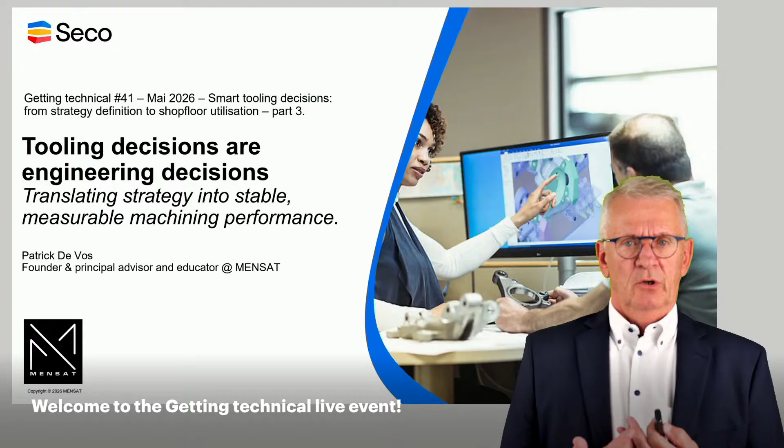Engineering, or engineering sciences, is about translating basic physics things into practical realizations. That's what we call engineering. In today's session, it's about machining engineering, which is about translating company strategy and company goals into machining performance, preferably measurable machining performance. That's what we're going to talk about today.

This is the third session in a series of 5. The first 2 sessions were more theory. Session 1 was a warning finger saying be careful, tooling is important. Session 2 was the first step in defining a good tooling strategy for a company. The first step has to be taken by management, who decide what is good for the company. Once that's decided, we come to the third step in the process, and the third step is about engineering.

In company language, engineering is what is done, and company by company it can be called different things. Some companies call it production engineering, others call it planning and programming, where the NC programs are made. Other people call it the work preparation department, whatever. It is the department where decisions are taken about when and how and who is going to produce our work pieces. That's the engineering department.

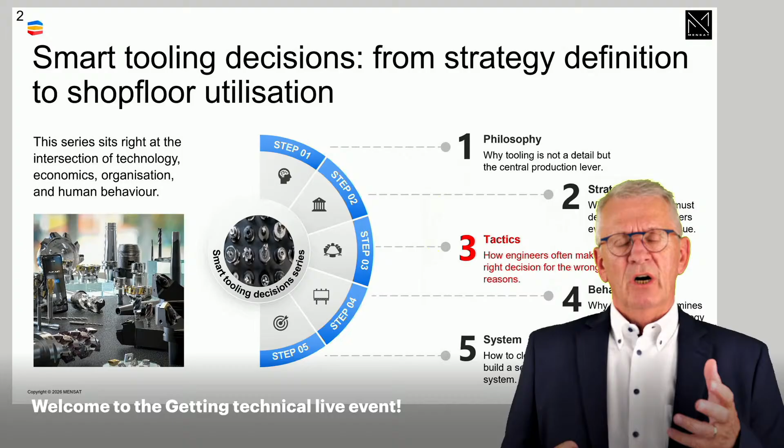Next time we are going to talk about more practical stuff, but let's stay today in the engineering phase of the process. And I'm not alone.

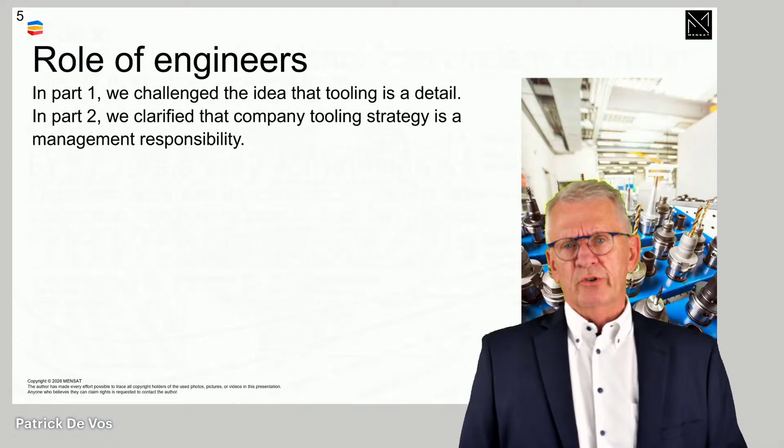Part 1, as I said, was about tooling is important. Some people now perhaps will say, yeah, of course tooling is important. But trust me, the sentiment very often, if you try to discover really in a company, is that on management level, at least, people think machines are important because they are expensive, people are important because salary costs are high, and tools, the cost of an insert is €10, tools are consumables, not important.

I challenged that in the first session, because tools are really important. Tools are actually the only place where the workpiece is in contact with the production equipment, the cutting edge. Tools are important, and you better spend some time on it, because if you don't do that, afterwards you kind of will be, allow me to use the word, punished for that.

If tools are important, and if tools should be handled in the correct way, everybody has to take his role in that. Management has a thing to do, engineering has a thing to do, and afterwards operators have some job to do. Management we already talked about in part 2 of this series, where we said the role of management is not about the details. Management does not have to decide on carbide grades and geometries and all that type of stuff, but management has to decide on what, on a company level, are important goals.

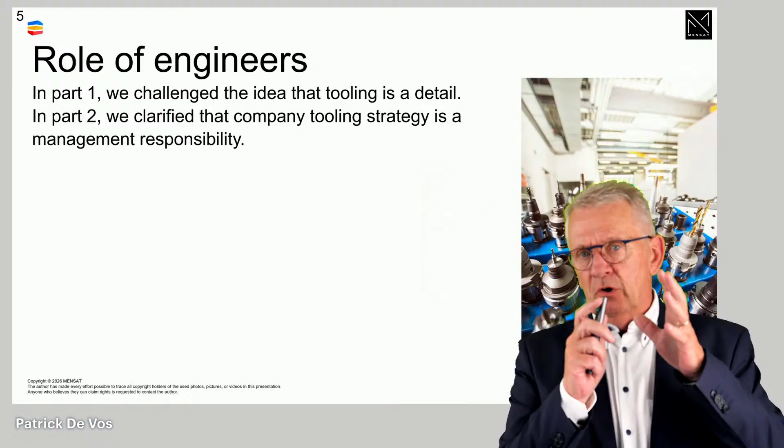What are the KPIs for the company? Is it productivity? Is it profit? Is it cost savings? Is it sustainability approaches? Whatever. That's up to management.

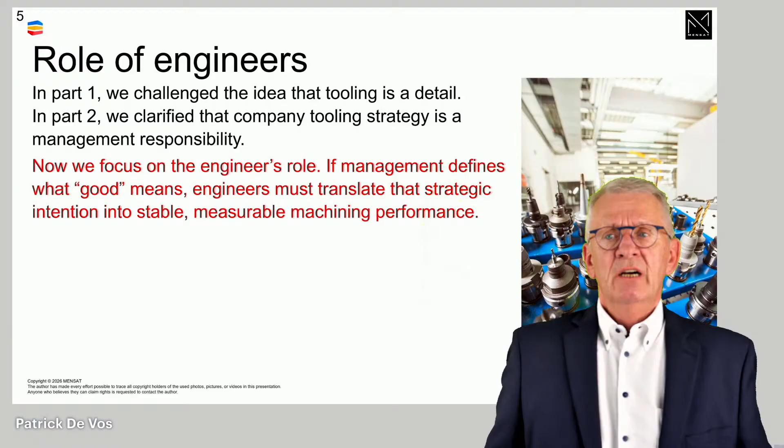Now in part 3 then, we come to the engineering side of it, and what engineers have to do is take what management decided as a target and define processes and systems so that target is realized. Part of those things is tooling. This session is not about carbide grades and different types of geometries, because for that there are technical educations and technical trainings. What we are going to talk about today is how do we decide?

Let me give you an example. Suppose management did not do their job, and we leave it to the engineers to select tooling, to select processes. Well, you are going to find your company full of Ferrari cars, and all those cars are going to be in a race to be fastest. That's the result if you leave it to engineers. They go for performance, they go for speed, it must be fast, they want to win the best possible, highest performance. And nothing wrong with that.

But the question should be asked - imagine if we stay with cars - somebody says it would be handy to have a family car, because my wife or I have to take the children to school and do some shopping for groceries. So we need a car with room for children, and a trunk big enough for the groceries.

And as most parking places in cities are rather small, the car should not be too big. And since mostly my wife is using the car, and she doesn't really care about Ferraris and Lamborghinis, it must be a handy car for her. But she prefers red - red is important for her. She wants a red car.

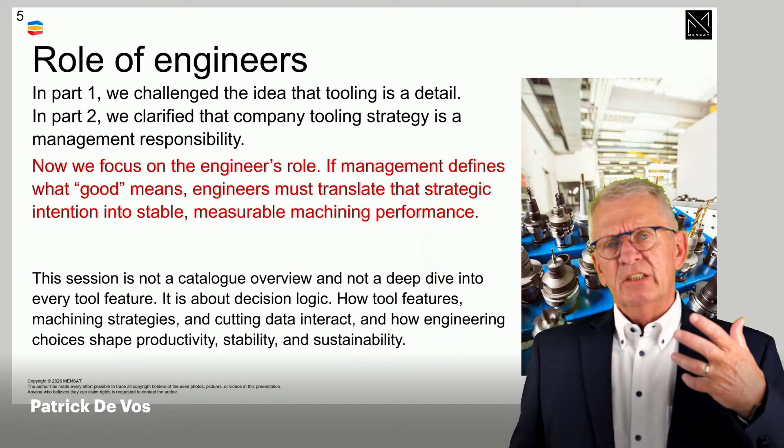What we are going to talk about today is: okay, with that as a mission defined by management, how do we find such a car without going into details like brands and stuff like that? So it's not about how you use a catalog in this session - it's about how we take decisions.

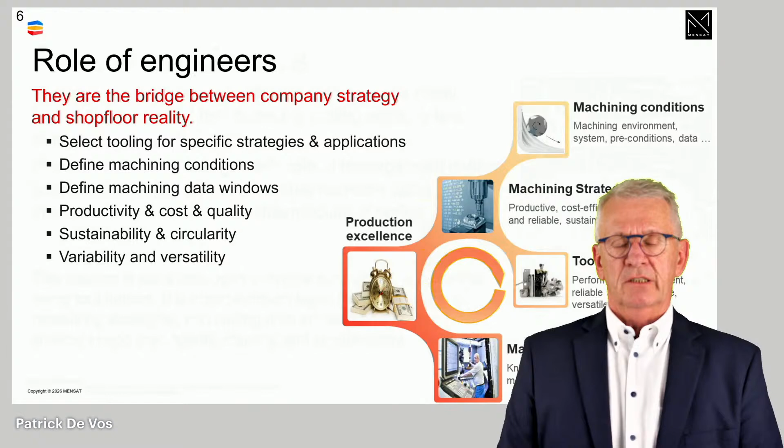And engineering - the role of engineering - sits between company goals, what you see here to the left. I call it production excellence, however you want to fill that in. We want to be the company with high production excellence - in other words, somewhere we want to be better than our competitors, so we can beat them and take a bigger part of the market. That's the company target.

To the right in this picture - once we know what we are after, we have to define machining strategies, define tooling, figure out cutting conditions and cutting data. This is what engineering really does: taking company targets and translating them into technical choices, made in such a way that the target is fulfilled.

At the foundation of this picture, I'd say, are the workshop people. That is something very often overlooked, because as we'll see next session, whatever the company target is, and however well engineering translates that into strategies, tooling and cutting conditions, reality will always interfere with the plan. And fixing that - that's the role of operators. So engineers must somewhere find a method, a system, to interlock operators into their procedures.

Operators are very important - I'm going to come back to it, it's part of the game. And if you see it like this, what engineering does is not just selecting cutting tools. What engineering does is defining processes, defining process behavior, and figuring out how to mix all the different elements so that the target is achieved.

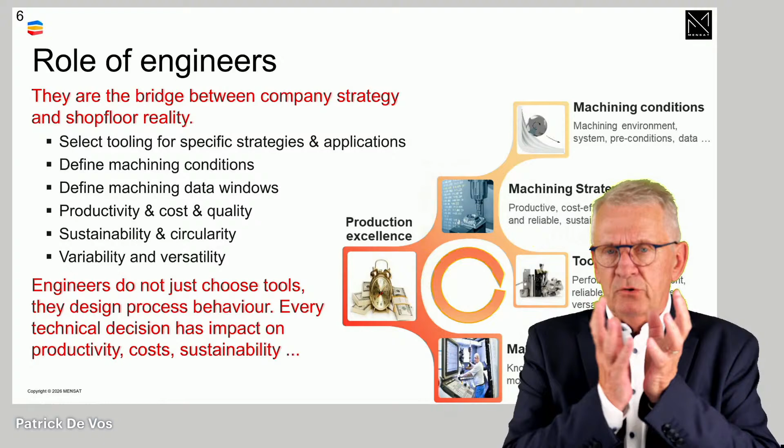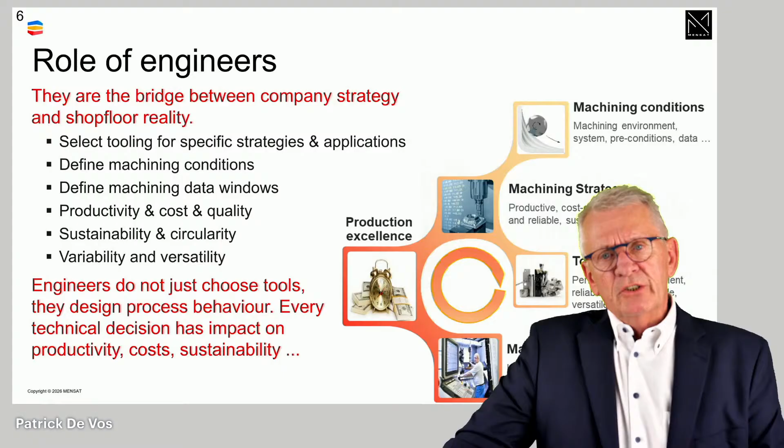...is only obvious, or only comes to the surface, when you put the tool in a certain environment, in a certain application. If you open any catalog, trust me, catalogs are full of good tools - if a tool were bad, it wouldn't be in a catalog. But not every tool in that catalog is the best tool for a certain application, in a certain company.

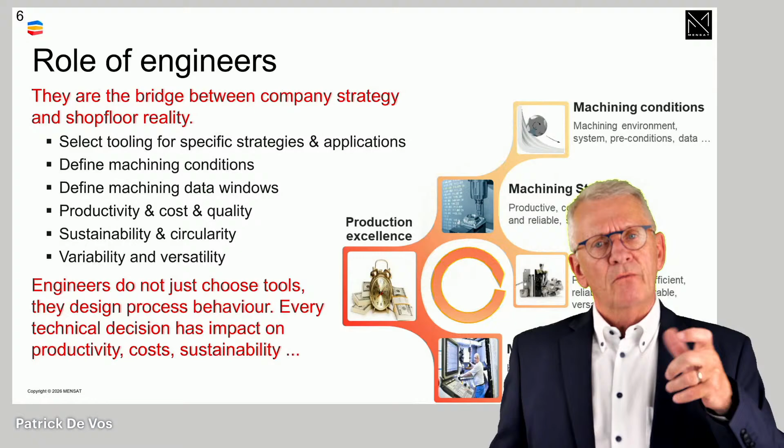And that is why, before going into details like carbide grades and stuff, engineers need to take different types of decisions - the more overall decisions, the decisions that link tooling technology to machining technology, and make tooling technology part of machining technology. Now, it's a vice versa way too, of course, but that is really what they have to do.

And here I want to put something in between, because I've heard this, I think, a million times in all my years in machining. When you start talking with engineers - and operators are all in the same bed, so to speak - often when you start talking about productivity, costs, profit and sustainability, a very traditional response from an engineer is: 'Excuse me, I'm not an accountant, I'm a technician.'

I find that so strange, that kind of aggressive thing - I'm not an accountant. You hear sometimes from the supplier side the same thing. They talk about the tool and the technical stuff, and the moment the customer asks about cost, they say, I don't know, I'm a technician, don't talk to me about costs.

Of course, a machining engineer is not an accountant, I know that. But what a machining engineer has to realize is that whatever decision he takes about any technical aspect of the tool or machining process, there are consequences - technically, but also economically, and also from a sustainability perspective. Because if an engineer takes a high-performing tool with very high cutting conditions, it's all very nice, but typical for such tools and applications is high energy consumption.

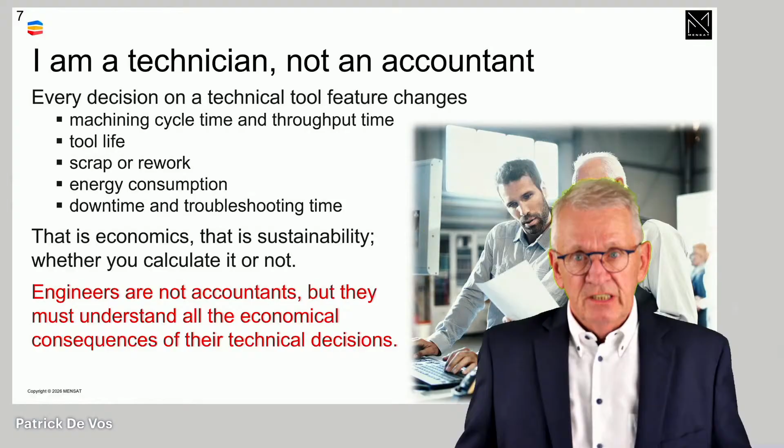It's part of the game. And if in a company people are a little bit allergic to high energy consumption, that creates a kind of conflict: the engineer goes for high energy consumption solutions, while the company is chasing low energy solutions. The engineer can say, that's not my concern - but it is his concern, because it's his decisions that decide on those things.

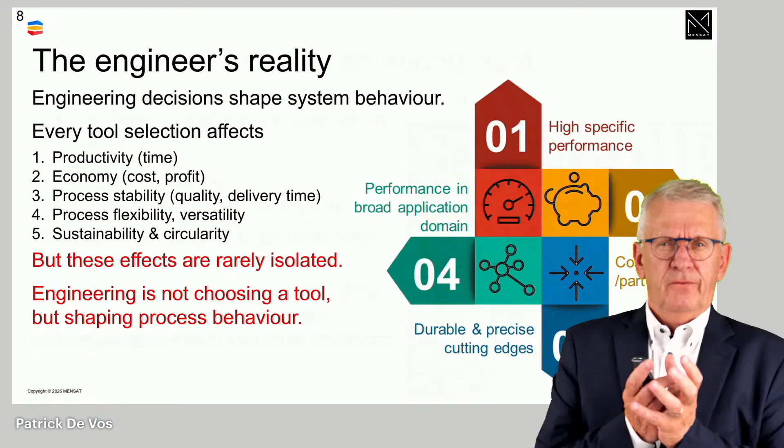What engineers are confronted with - and here I tried a little bit to group company targets into 5, or 4, families, because every company has different targets, obviously, since every company is unique. But if you listen to the targets companies have, they can be about productivity.

It's about time - produce a lot in a certain time, or produce some in shorter time. The moment people start discussing time, productivity is what they are after. And if productivity is what you are after, you need tools that perform. If I talk about a car, if speed is what you want, you need a car capable of reaching high speeds. Makes sense, I think.

In other situations, companies go more for the cost perspective, the profit perspective - and it could be that in one company, at different moments in time, they have different situations. But if a company goes primarily for economy, that means the target in machining processes is not speed, but cost. If I translate it to a car: if you need a family car with the lowest cost possible, perhaps you should go for an electric city car instead of a high-performing Ferrari with a V8 engine.

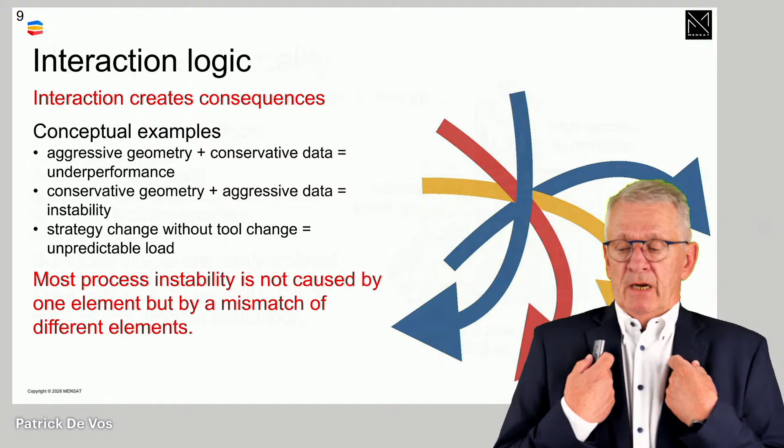Now, engineers have to handle interactions, because true results depend on interactions between different elements. If you go for a sharp geometry and combine that with conservative cutting data, it won't work.

If you go for a strong geometry and combine that with aggressive cutting data, it won't work either. So it's not about every element on an island, it's about how things interact. An engineer should be careful not to have too focused a look.

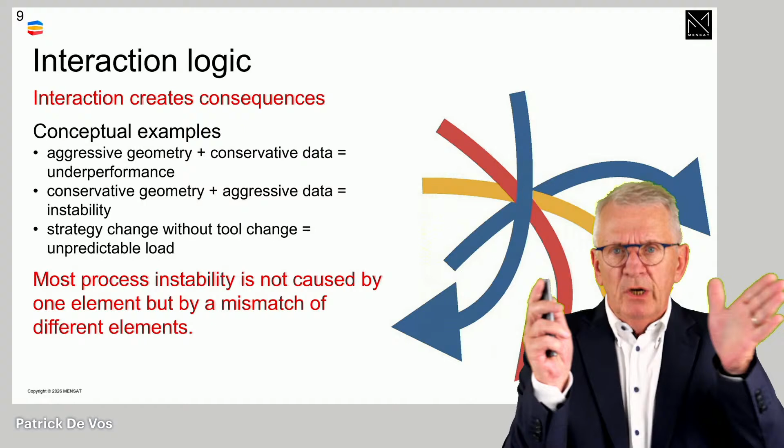He should keep a broad look on things, meaning it's not only about technical stuff, but also about being aware of the economic dimension. If you decide to change a cutting speed because from a technical perspective that would be better, nice, but there are other consequences. Some are economic, because higher cutting speeds mean lower tool life, so you need to buy more tools, as a simple example.

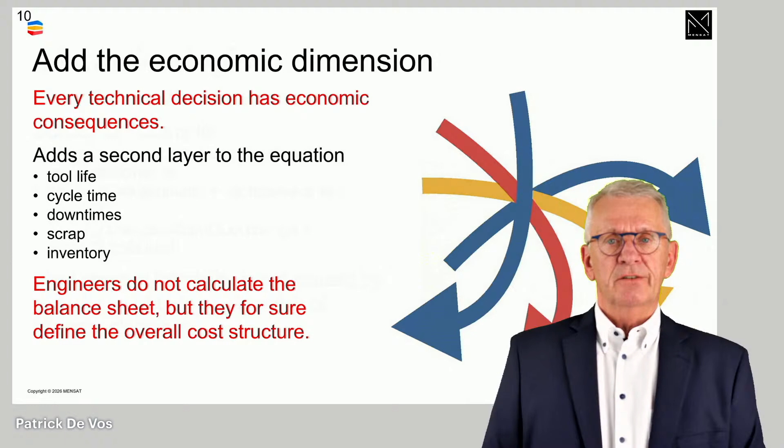There are sustainability things to remember too, because if you select the wrong geometry, you could end up with higher cutting forces, which means you need more energy. If you have an unreliable machining process, you could end up with wrong workpieces that you have to scrap or rework, which is waste. And waste is what it's about when we talk about sustainability.

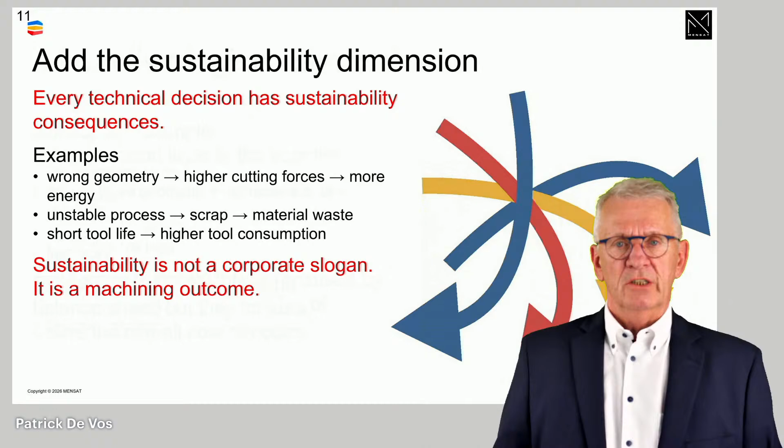Now, going back to this picture, where to start, because it kind of all links together. Obviously, it starts with company targets - the role of management, you remember? Management decides company targets, then engineers have to decide tooling strategies, machining strategies, and cutting conditions.

I think machining strategies should be the first choice. Second choice is to make sure you come to a tooling selection that can be applied in that machining strategy. Cutting conditions are kind of the flexible thing here, because however the physical tool works, you will influence that by how you select cutting conditions. For me, that makes sense to do it in that order.

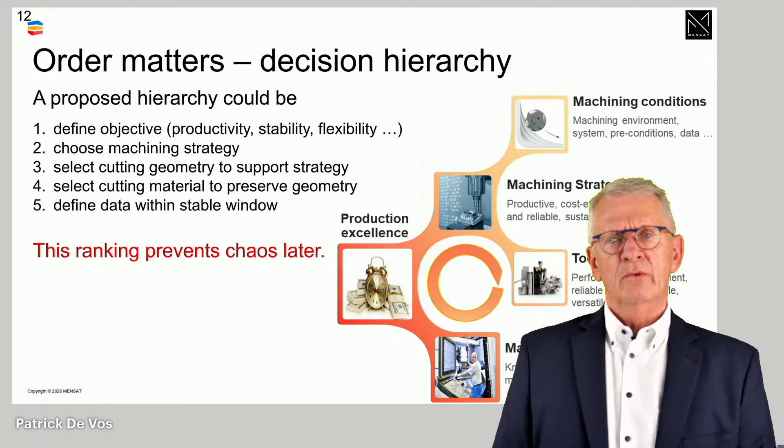What is wanted by the company? What is the definition of production excellence in a certain environment, company? How do we select machining strategies for that? How do we make sure tooling is correct to be applied in those machining strategies, and use your cutting data as a connection element between the two? Operators are always there and should be kept in mind.

I think the first step, before optimizing - because people always like to optimize this, optimize that - first it's about stability. What engineers first have to decide, once they've decided on a strategy and a tool, is for that combination of tool and strategy, what is the window where we can use the tool concerning cutting conditions. So the tool acts as a stable element in the machining process.

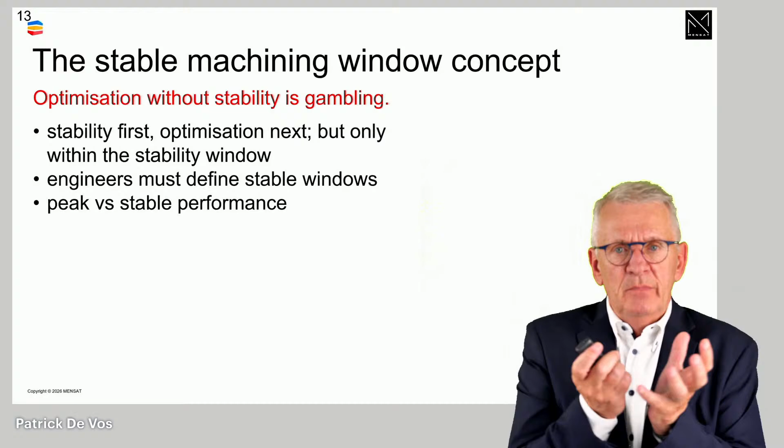And to achieve that, once again, an engineer should look at all the elements, not just one. Optimizing a cutting speed is a nice objective, but if you do that, you have to keep your eyes on all the other stuff around it. You have to be aware that things are related to each other.

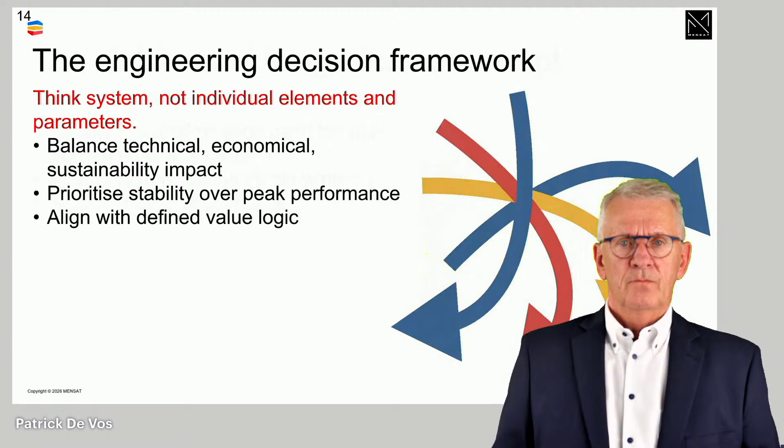And keeping an eye on things because they're related means that, typically in engineering, an engineer has to decide on trade-offs - if I go for something, something else will change, and if that's not good, then I have to trade off those relations. One very typical trade-off is the workpiece material and the cutting material - those two need to be compatible.

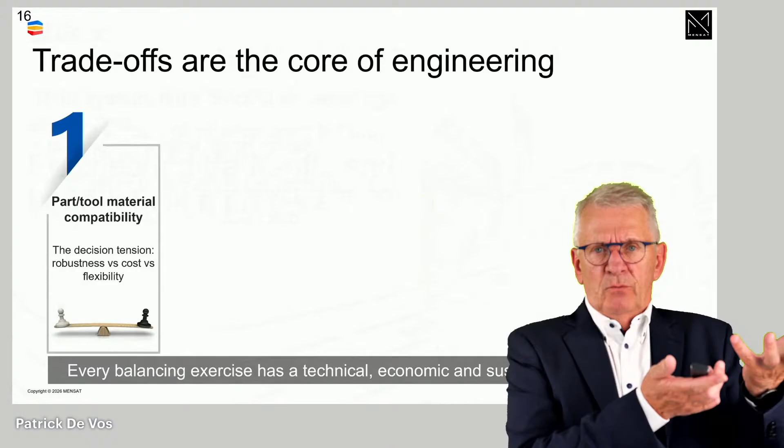If a workpiece material is something, then a good cutting material will be something else. At first sight, one could say, okay, makes sense - for steel I use this cutting material, for stainless steel I use that cutting material, and so on. However, if the company target is flexibility, we'll be confronted with a situation where we have to machine steel, stainless steel, and titanium. Depending on what the company wants - performance, productivity, or flexibility - which cutting materials to select becomes a trade-off.

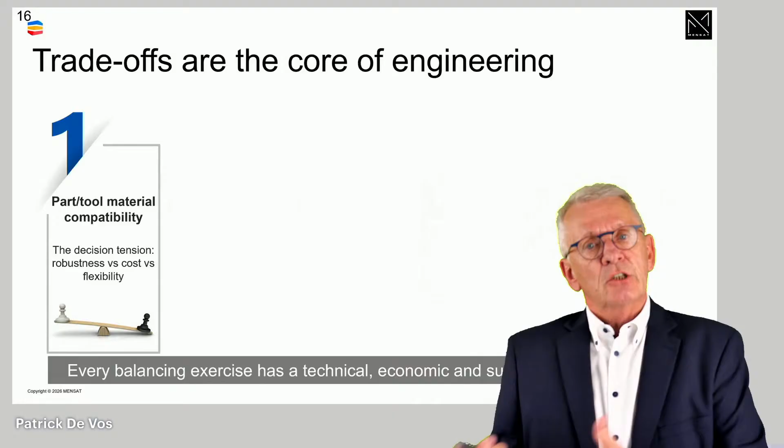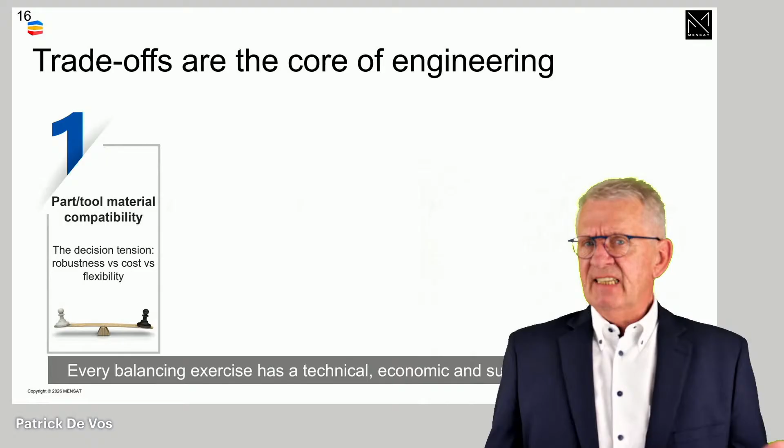You can go for one cutting material that can be used across all three workpiece materials. That's very nice for the versatility approach, but from a performance approach it's perhaps not the best solution, because the best solution for performance would be a different carbide grade for every individual material. But that would mean from a flexibility perspective it's less handy to have all those different types of carbide grades in the company. That is a trade-off engineering has to decide on.

Another trade-off is long tool life versus high productivity. That's a classic one in machining. Whatever tool you use, if you want long tool life, you have to reduce your cutting conditions, but reducing your cutting conditions means your productivity goes down - you need more time to create the same output. If you want to reduce the time to create output, you have to increase your cutting data, but that means your tool life will be shorter.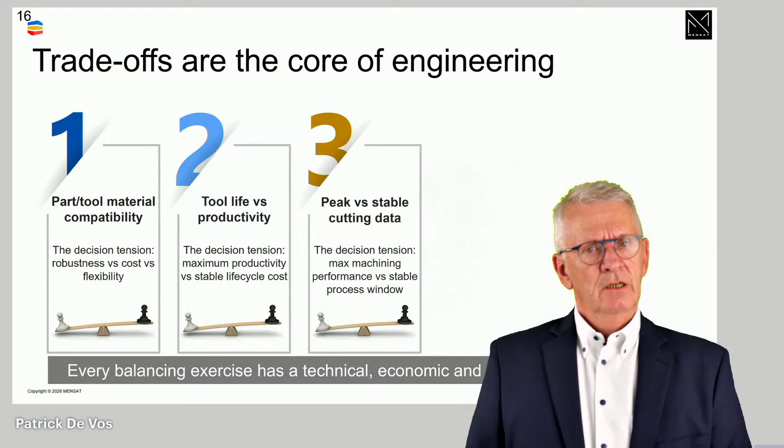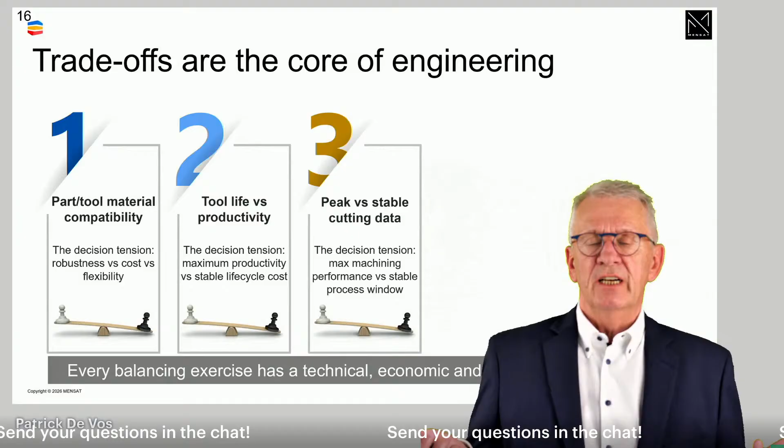A decision to take. The third trade-off is, do you want to have peak performing cutting data, or do you want to have stable cutting data? Here I'd like to remind everybody of a typical engineering practice: you find out what the maximum is, and then you reduce it by 30%, just to be safe. Have you ever considered doing this in machining? You find out what the maximum cutting speed is you can run a certain tool in a certain material, and then you reduce it by 30%, just to be safe, just to have a stable process. Do you always want to be on the edge, or in a stable situation?

A decision to take. But if you reduce by 30%, there will be consequences. Your performance goes down by X%. Acceptable or not, an engineering decision to be taken.

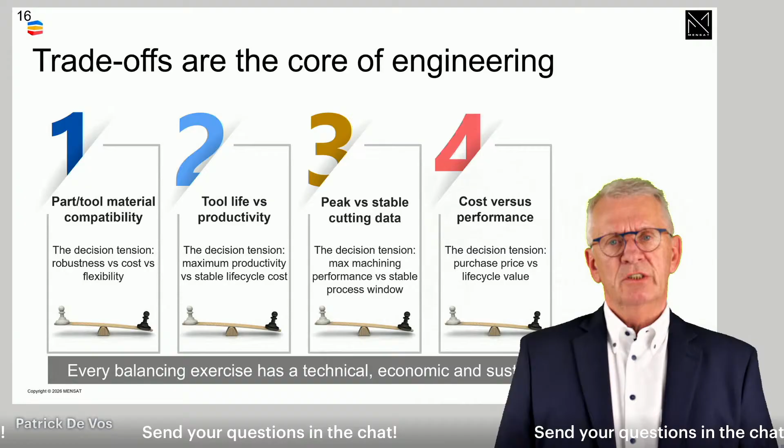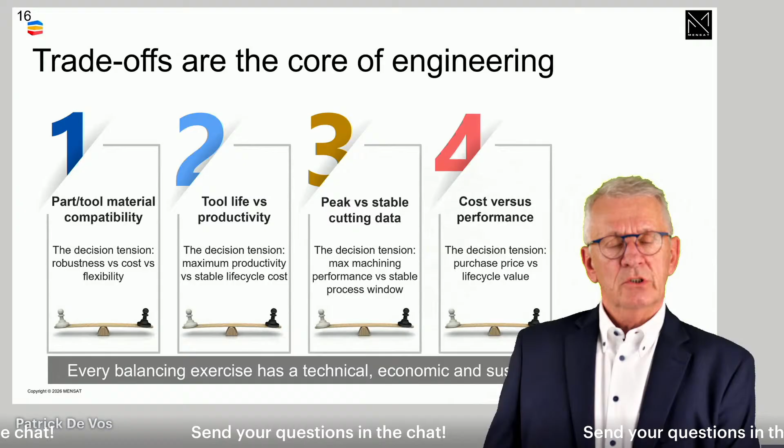Cost versus performance. If you look at the process itself, do you want to produce your workpieces as cheap as possible so you can, with a reasonable profit margin, have a sharp market price and attract more customers? Or do you go for high performance machining so you can produce more workpieces in a shorter time and use that as an attraction pole for customers? Two different approaches from a process perspective, and of course, depending on where you put your priorities, tooling will have to follow. And the fifth one is about supply chain.

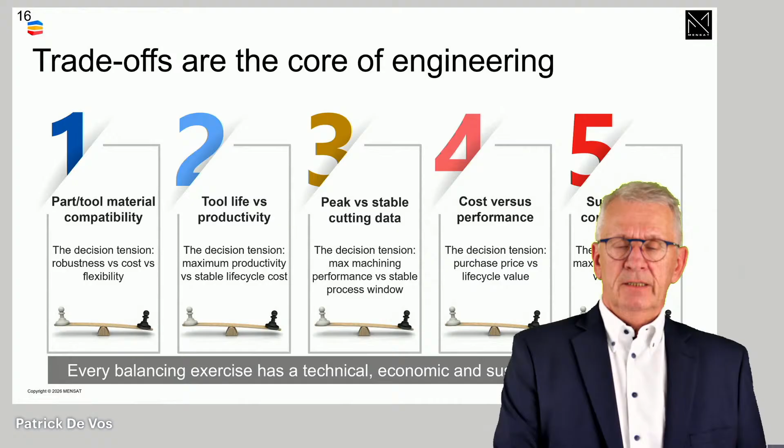This is about suppliers and delivery. Because if you go for high performance, you need specific high performing tools, and perhaps somewhere you end up in custom made tools. But if you go that way, you have to take into consideration that your supply chain is getting more fragile, breakable. If you don't want that, you have to stay away from custom made tools and go for the standardized tools you find all over. It's also an engineering decision. And this fifth one, sometimes engineers forget a little bit—'oh, I want this special tool, best possible' and so on—but think about supply chain considerations in that perspective.

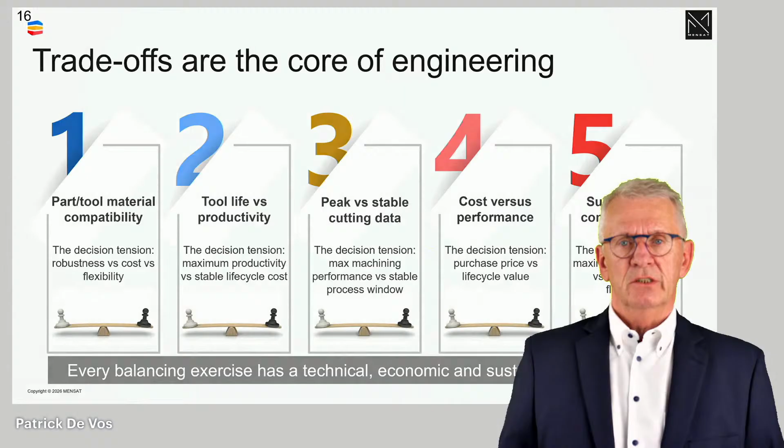In the end, every tooling decision is a compromise between things. The big question is, is the compromise a deliberate one, the one you want, or is it created by coincidence? A typical example here is cutting geometries versus cutting materials. In the past, as a teaser, when I was doing technical seminars, I asked participants: what's most important, cutting material or geometry? Mostly people fell into the trap, if I can say so. First of all, both are important. The difference is the sequence in which you select them.

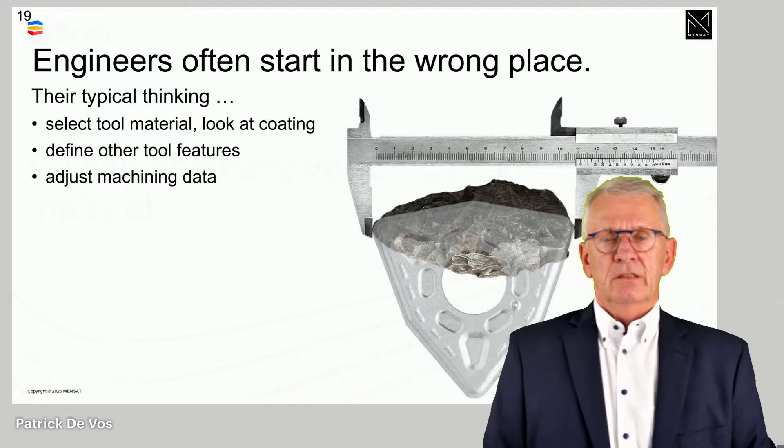Very typical for machining engineers is they start with cutting materials. After the cutting materials, they select all the other stuff—the geometries, the dimensions, the edge treatment, whatever. And then in a third step, they select cutting data, which is very typically done. It grew like that from a historical perspective. But for me, based on my experience, and I don't think I'm the only one with this, I'm not so special in this...

The first selection point should always be geometry. The geometry truly defines how the process is going. Once the geometry is selected in the best possible way, whatever the targets are you have, then you select the cutting material, and the cutting material is kind of the sustainability factor to the geometry. The cutting material must make sure that the cutting geometry stays as long as possible fully operational. That's the role of a cutting material.

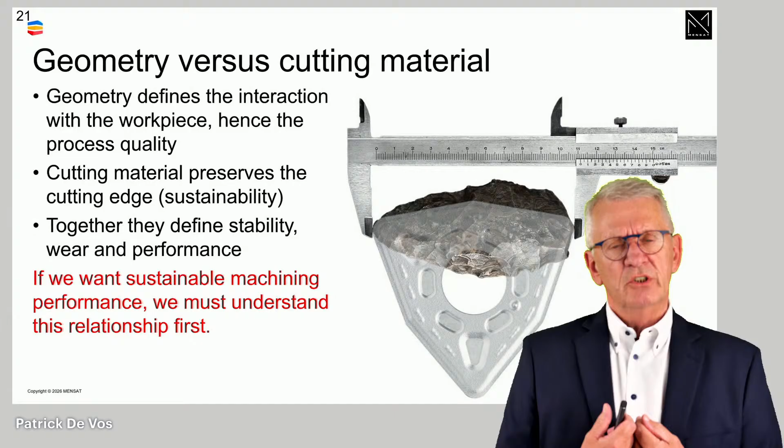The geometry defines how the interaction takes place between workpiece and cutting edge. The cutting material preserves the cutting edge or cutting geometry for the longest possible time. And if they fully work together, then you truly have a stable, wear-resistant, high-performing cutting tool.

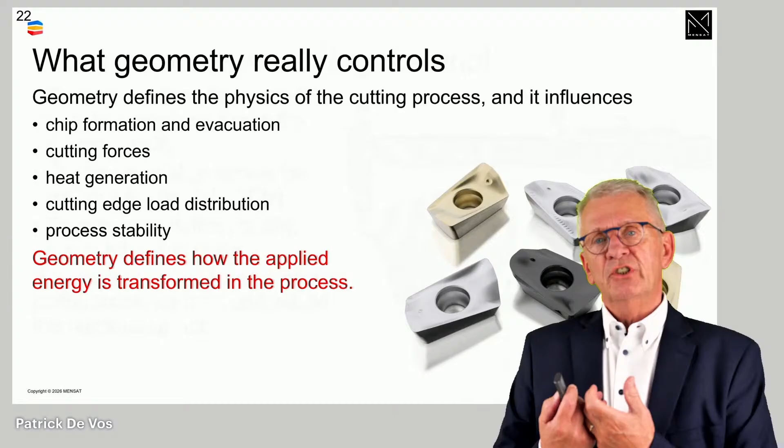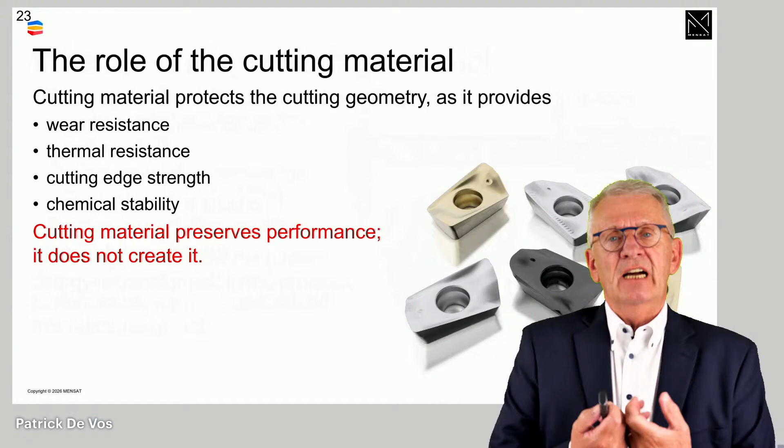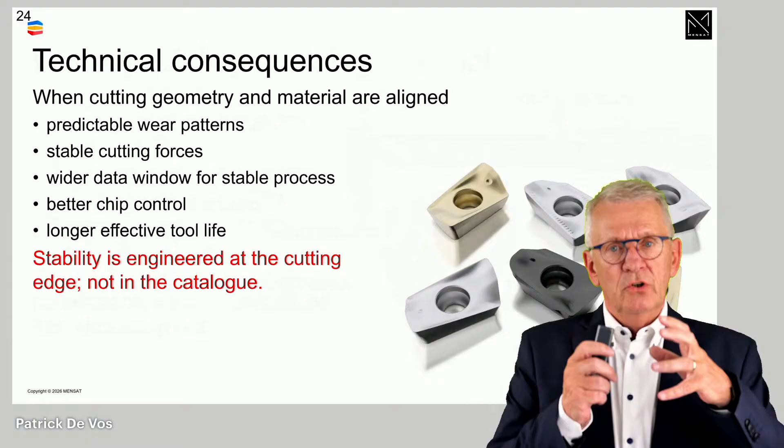So if sustainable machining is your target, you have to really understand this relation. The geometry defines the physics of machining—the cutting forces, cutting power, energy, chip formation, whatever. All of that is defined by the geometry in the process. And if what you see is not good, you have to play with geometries. Once you have a geometry which is working in the best possible way, then you select the cutting material that supports the geometry in the best possible way—in other words, that adds wear resistance and thermal resistance to the tool, so the geometry can do its job as long as possible. And if both of them are fully aligned, that's the moment you have your stable, robust, reliable, sustainable machining process.

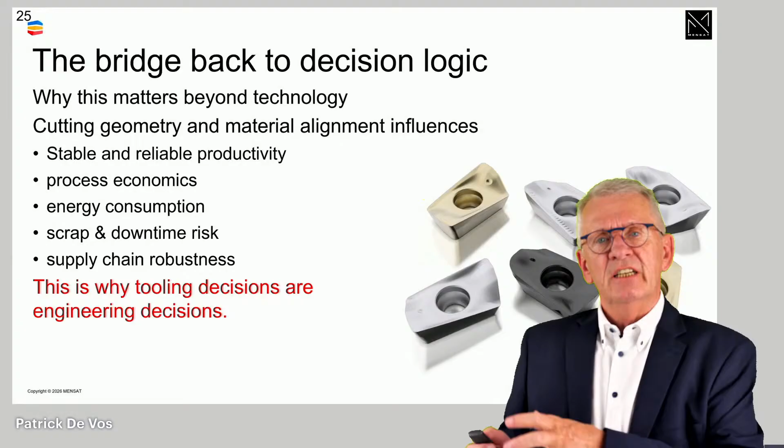And you see, we have been talking about the performance of a cutting tool, and we haven't mentioned one single carbide grade or one single cutting geometry. We have been thinking in a general way. So decision making in machining comes prior to filling in the details. That's perhaps the main message I have here today.

Now, if we look to engineers, machining engineers, programmers, planners, there are some discussions, but I would say, in general, the average engineer is rather knowledgeable about a machining process and what's going on. But what I also find is that if there are problems, most of the problems are related to behavior, to attitude, to mindset. And if based on that the wrong decisions are taken, you all know the consequences.

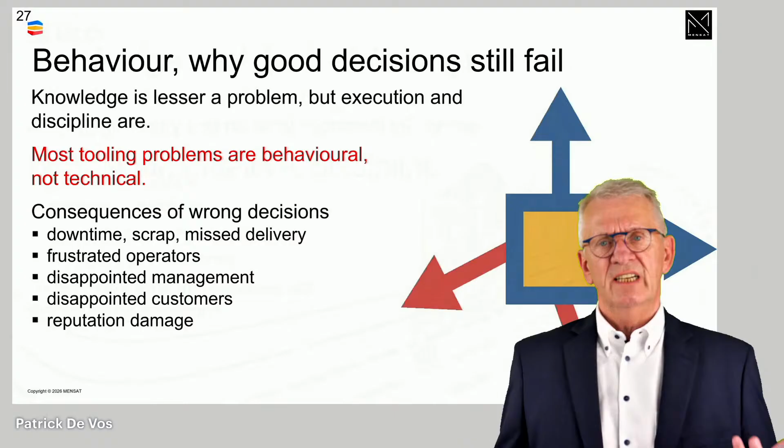Unreliable machining processes, scrapped workpieces, broken tools, and so on. And you know, typical mistakes, pitfalls, is over-engineering, just to prove it can be done. The drawing says a tolerance of a tenth of a millimeter, but the engineer is going to decide a strategy so the tolerance in which the workpiece is finished is a hundredth of a millimeter, just to prove we are capable of doing it. Now, it's all very nice from a tradesman's perspective to be proud, look what I can do.

But from a company perspective, it's over-engineered. It was not needed for. Money and time has been spent on something which is basically of no value for a customer. So most probably the customer doesn't want to pay extra for it because he didn't ask for it.

Chasing their own KPIs. But that's perhaps more a communication thing between management and engineering. If management is thinking in terms of cost savings and engineering, very typical, goes for high performance, there will be a conflict in the future, or perhaps the near future even.

So optimizing certain KPIs, performance, costs, quality, versatility, sustainability, all very nice, but make sure you optimize the right ones, the correct ones for the company.

And a third thing is changing everything at the same time. Looking at the process, the thing doesn't go as we thought, and then we start changing the tool and the cutting conditions and the machining strategy, everything at the same time.

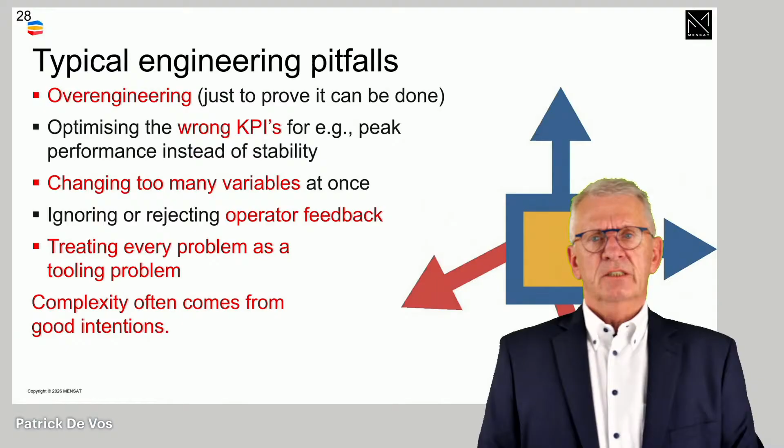And then there are the organizational things: engineering versus purchasing. Purchasing wants to buy cheap, engineering wants to have the highest performing tools. Company KPIs, tooling KPIs, which are not in line. Short-term fixes: there is a problem, we fix it, and we think, okay, it's okay now. It works. Today it works. Tomorrow we see tomorrow. And after a while having a multitude of different tools in the company, because every engineering decision goes into a different direction concerning tooling.

Here it's about discipline. And if discipline is not there, of course the system drifts away into chaos.

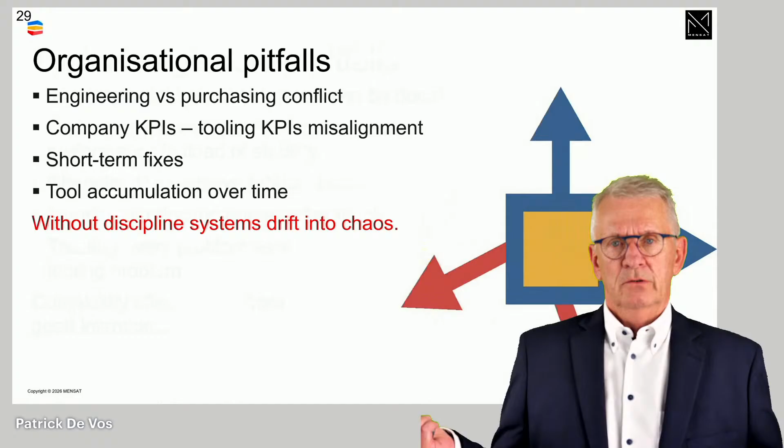The discipline of stable engineering is to define the data windows, cutting data windows where the process is stable. Document your decisions so you know tomorrow, next week, next month why you took today a decision.

You don't take every single day another decision. Rationalize where possible, standardize where possible, review systematically. The famous machining thing - we did it for 30 years like that, so it's good for the next 30 years also. Review systematically, I don't say change systematically.

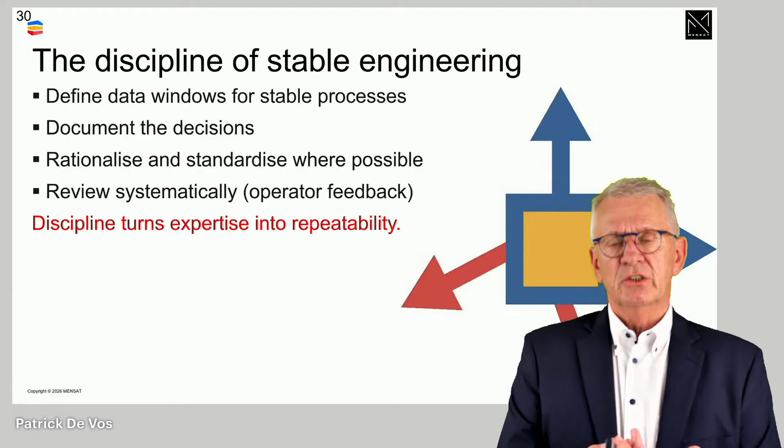I say review systematically, perhaps there is need for change. And if you have these disciplines, you end up with repeatable processes, which is so important to have sustainable machining processes that you can repeat things.

Sometimes engineers tell me, yeah, but the operators, they don't tell me anything. Yeah, but ask yourself your questions. Did you motivate them to give feedback? Did you listen to the feedback? Did you take care of that feedback and translate it back to management also? Perhaps it was a management decision that needs to be questioned based on the feedback coming from operators. So an engineer should not be afraid of taking operator feedback and take it to the management table.

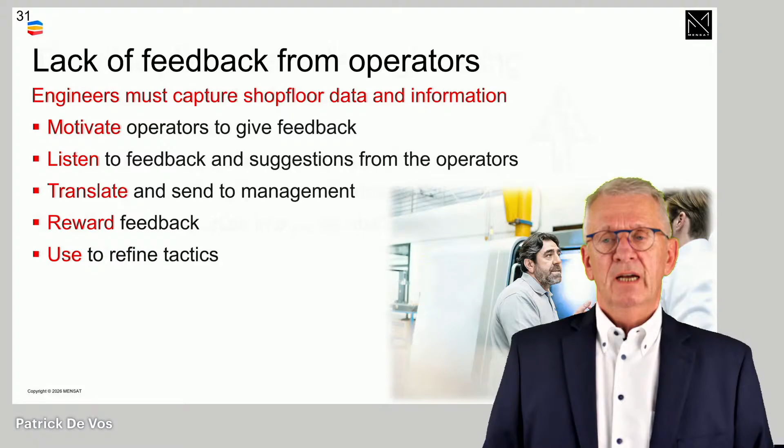Reward feedback. Most of the time, feedback is punished, is blamed. No, reward feedback - thank you for your feedback. And use feedback to refine things in the future.

The real responsibility is kind of everything together. An engineer translates a theoretical strategy into a practical reality. He has to balance things: performance, cost, sustainability, quality, flexibility. He has to find the best possible balance, but whatever he does, he has to make it utmost to protect that there is a stable process, a repeatable process.

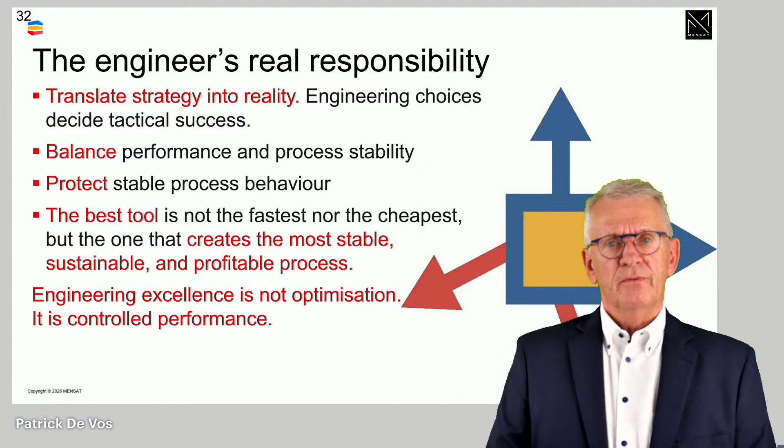And the role of tooling in this is not the cheapest one, not the best performing. A tool should be the stabilizing effect in the process and creates sustainability in the process. And in that respect, if you talk about excellence, engineering excellence should not be measured by optimization, but should be measured by

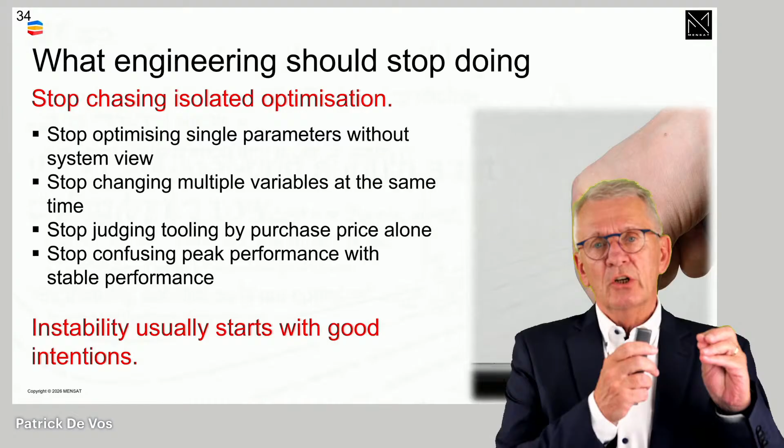controllable, repeatable, sustainable performance. And that means that, in a couple of words, what is the lesson to be learned from engineering? If engineering does isolated optimization, stop with that. Engineering is about a system. Engineering is not about one element. It's not about just the cutting speed. It's about the full system.

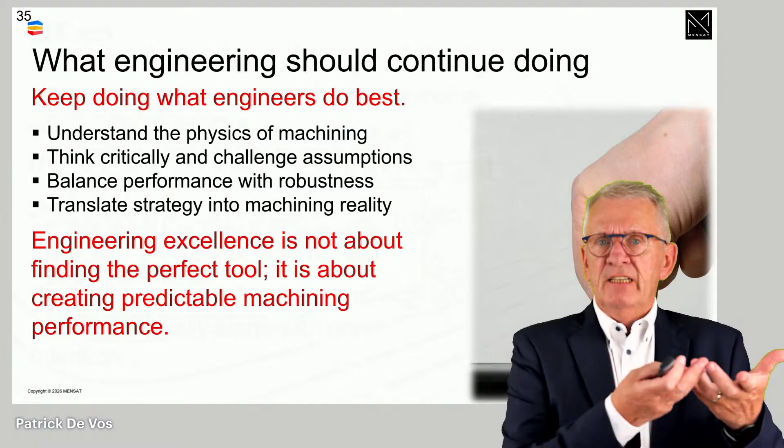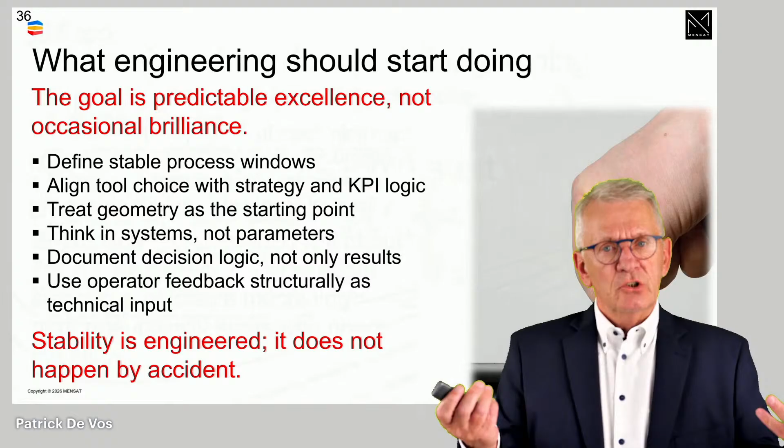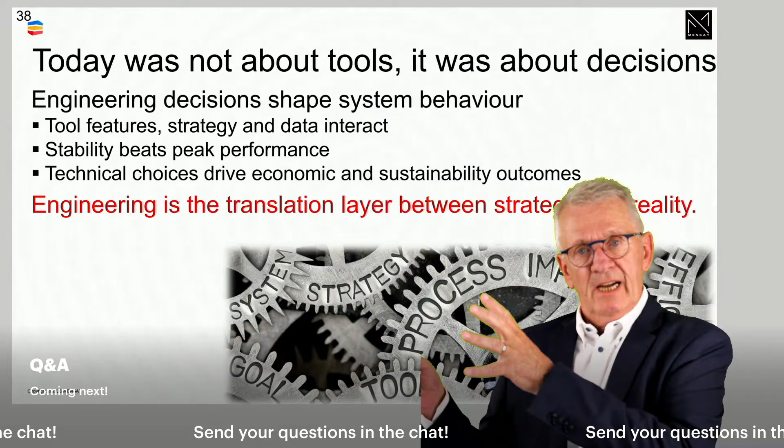It's about becoming the champion, and that is not just one game. Engineering should create stability, not complexity, not unique brilliance. That's kind of what I try to say. Engineering is a translation layer, that's what I try to communicate to you. Management has to decide on the strategy, operations later on has to execute. In between, in the middle, you have engineering, translating strategy into reality, but also bringing results from reality back to strategy. Engineering is a bridge.

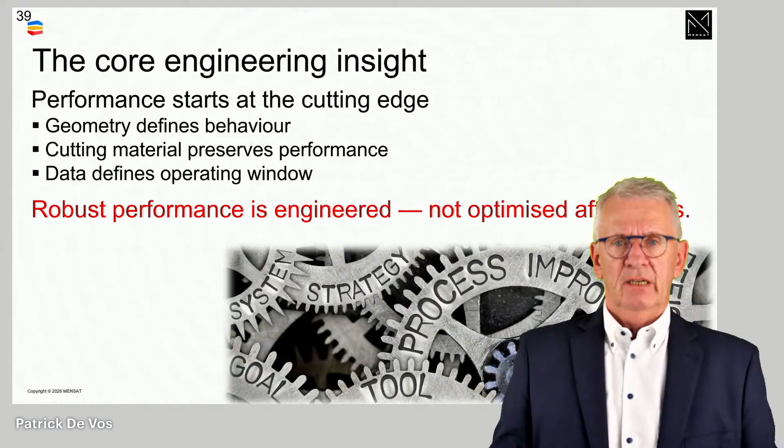Engineering should create robust, sustainable, stable performance, not just one single extremely excellent application. And engineering should not create complexity, but should bring calm into a production, not chaos.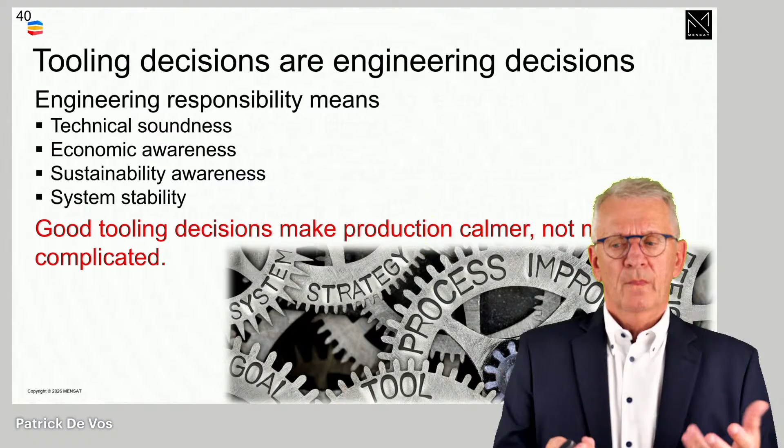In engineering departments, my experience is that it's not about knowledge. Most of the machining engineers or planners or programmers or whatever you call it in your company I met in my years in the industry, they are rather knowledgeable. There's always room for improvement, but they are rather knowledgeable. They know what they talk about, but it's more the mindset, the attitude or the behavior. I don't know what is the correct word here, but engineers by tradition they want to prove things in the performance thing, and it's okay, but it's not always what companies are after.

Most companies are after, first of all, sustainable solutions, not unique, one-of-a-time, high performance thing, and the next day it collapses.

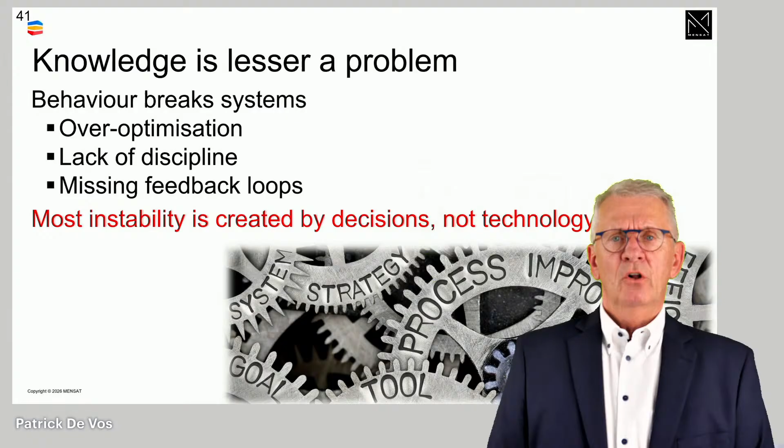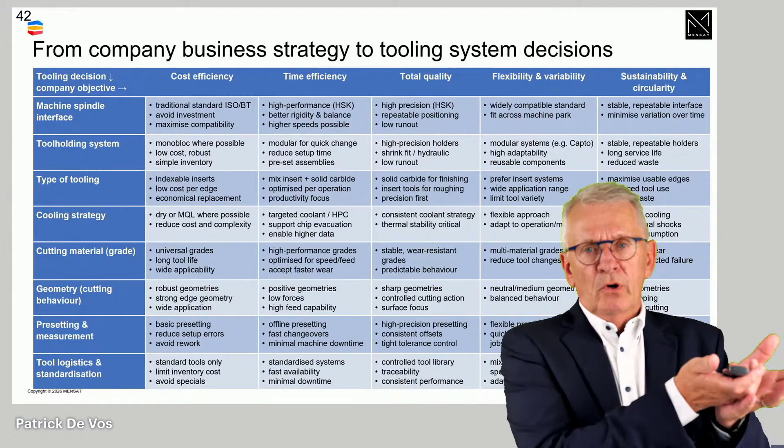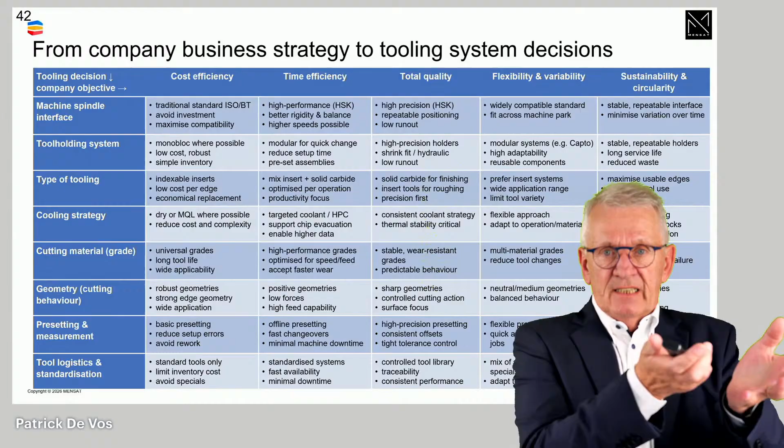What you find here are guidelines in that respect, and here you can define a kind of best tool. Then it's up to you to take that as a description, to have a talk with people in the tool crib in your company or with suppliers and say, okay, this is my little red car with room for children and grocery shopping, and it should be handy so I can park it in a small parking place. This is what I need, give me something that answers to this description.

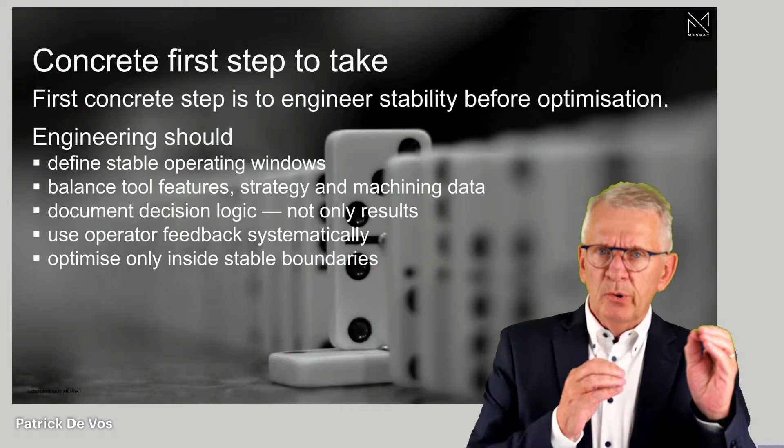By defining and working with different elements, engineering should set stable operating windows, tool features, strategy, and machining data balanced in a correct way, and document everything so it's saved for the future. Listen to operators because they mostly want to give feedback, and that feedback tells you how reality reacts to your plan, and if not, how to change your plan. In the end, you can fine-tune and optimize a little bit here and there, as long as you stay within the stability window.

Once that is done, we're ready for the next step, which will be the next presentation, where we want to talk about the role of operations in the picture, the role of operators. Because now we're in a situation where everybody in the company knows tooling is important. Management decided what's important for the company and communicated that to engineering, so engineering could take the correct production decisions, and now those decisions are entering the workshop, and operations is going to apply them.

What's the role of operators? First of all, I don't believe in what we call button pushers, the production monkeys. I think in machining, especially today, the role of an operator is much more valuable and important than that. But that's the subject for next session, planned for beginning of July. I hope to see you there, so we can continue the journey together and figure out the role of operators in creating excellent production so the full machining company is successful.